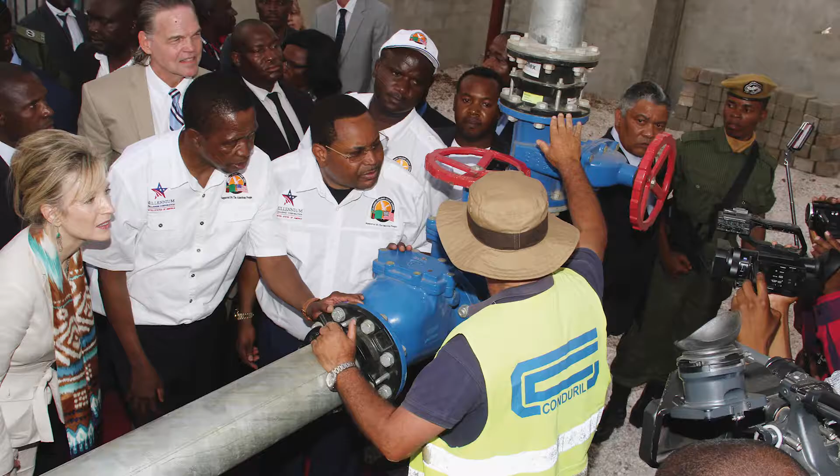The signing of the Millennium Challenge Compact set forth the terms and conditions upon which the MCC provided funding not exceeding $355 million to the government for the Millennium Challenge Account Program, assistance to advance economic growth and reduce poverty in Zambia.

The target was Lusaka City. With a population of over 2 million people, the city was struggling with major challenges in water supply, sanitation, and drainage.

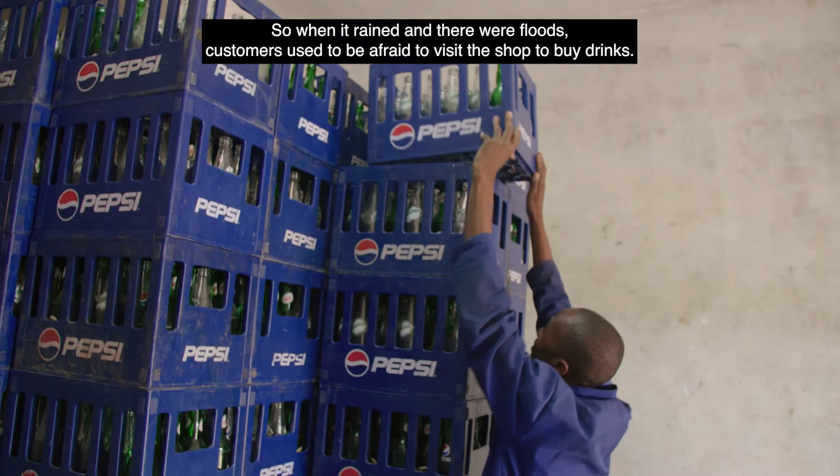In order to identify some of the key areas that needed infrastructure development to improve clean water supply, sanitation and stormwater management, master plans were developed. These master plans outline all major areas in the water supply, sanitation and drainage sectors that need investment and development for the entire city of Lusaka.

Thus, from these master plans, the MCC Zambia Compact identified critical areas that needed investment and development to lead to subsequent poverty reduction, improved health, economic growth and expanded access to clean water and sanitation.

When the proposal was approved by the Millennium Challenge Corporation, we did further studies to document exactly what the problems are in the water supply, sanitation and drainage sector.

Through the investment master plans done with the support of MCC, we were able to determine the magnitude of the investment required in the sector, clearly demonstrating that very little has been done. Looking at the figures over a 25-year period, up to 2035, about $4 billion is required to be invested in the water, sanitation and drainage sector.

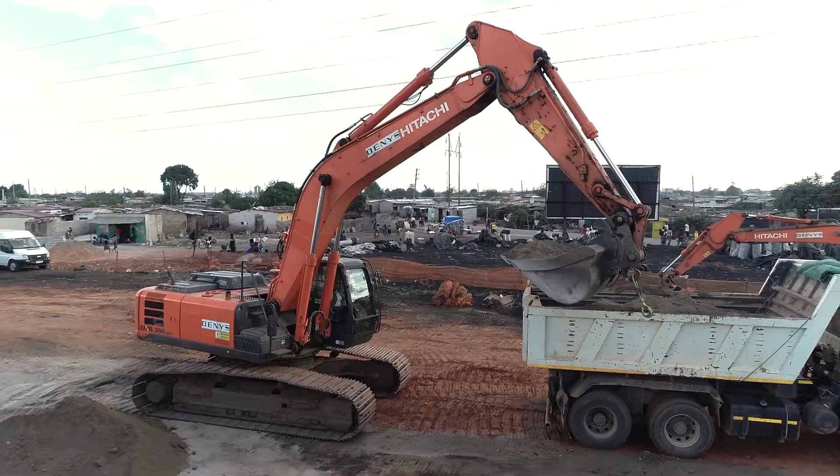Areas like Mtendere were to receive an expanded water supply network and a new sewer network. The area was not only picked because it lacked these services, but because it lies on an aquifer from which Lusaka Water and Sewerage Company draws water.

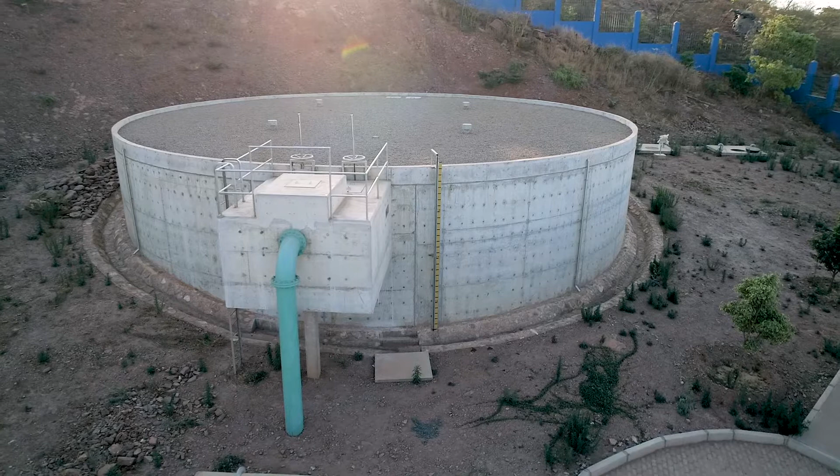In order to save this water from contamination due to the many pit latrines in the area, the new sewer network was inevitable.

The first 6 contracts or construction packages were water and sanitation. And then there was CP7 and 8 as well as CP10, which were drainage projects, in total almost 24 kilometers of stormwater channel.

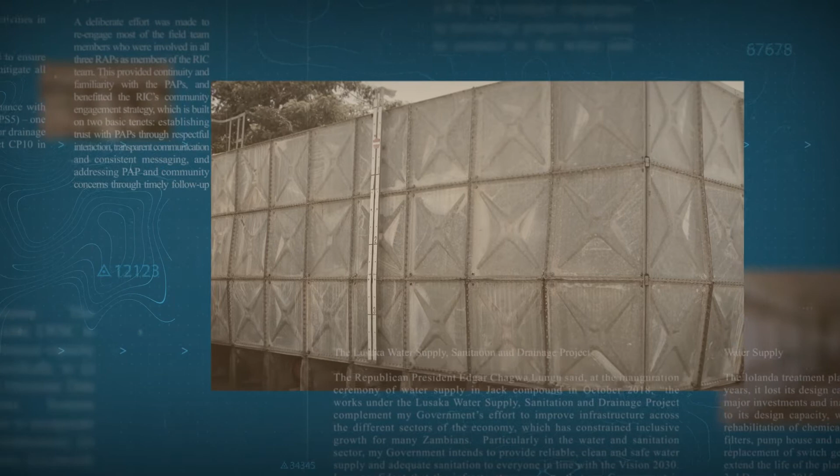The contract to rehabilitate Iolanda treatment plant in Kafue, 10 distribution centers, and installation of new pumps and water supply pipeline was awarded on 3 December 2015 and was worth $45.953 million. The contractor was Denys.

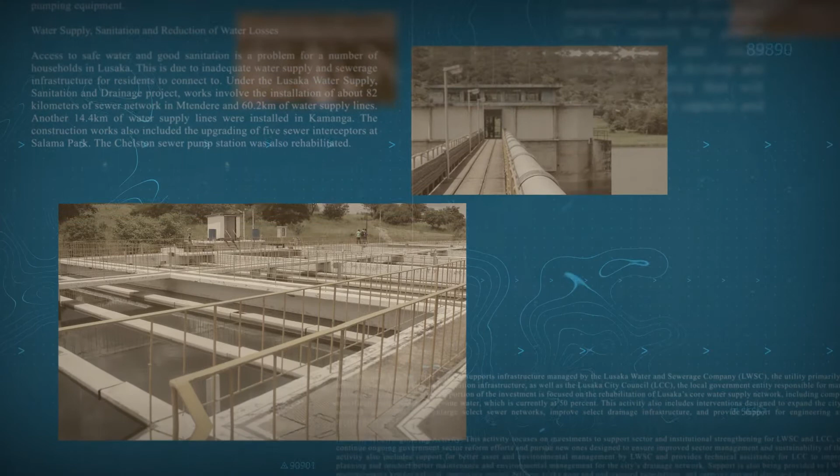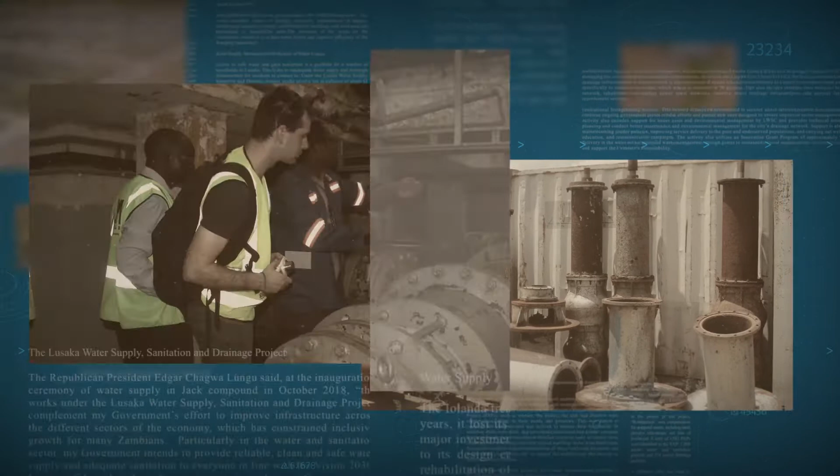The works done under these contract packages include rehabilitation of intake structure, chemical house, sedimentation tanks, sand filters, pump house and administration buildings, and replacement of pumps and switchgear, all done at the Iolanda treatment plant. The aim was to extend the life of the plant by 30 years.

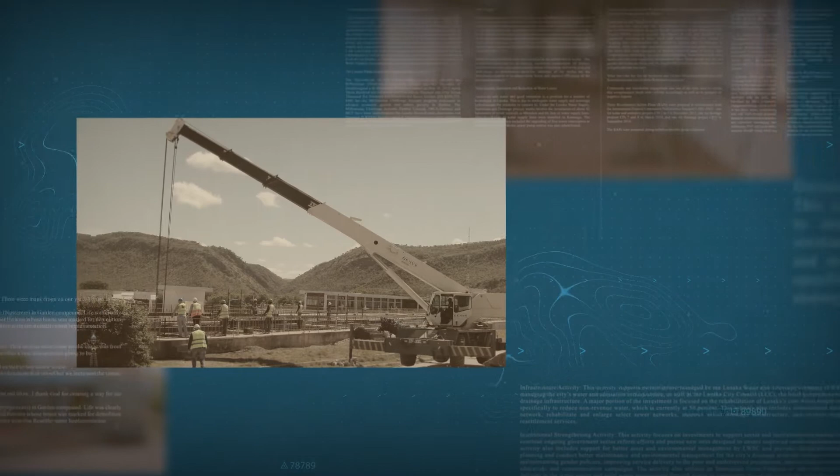Other works included rehabilitation of 10 distribution centers through repair of leaking reservoirs, replacement of pumps, introducing telemetry systems, rehabilitation of buildings and work areas, and installation of disinfection units, among others.

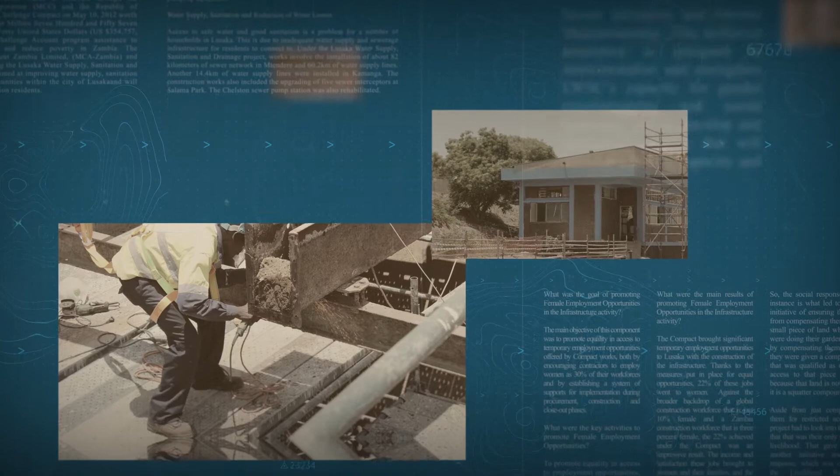At the end of the works, the goal was to restore the design capacity of the Iolanda water treatment plant to produce 110 million liters per day, or 110,000 cubic meters per day.

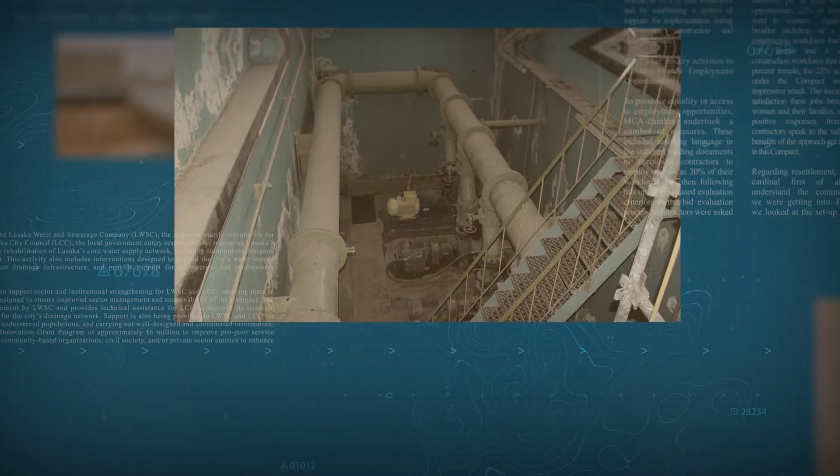The water produced and pumped from Iolanda water treatment plant is distributed to various consumers through a number of distribution centers. The intention of the Lusaka Water Supply Sanitation and Drainage Project was for the distribution centers to reduce water losses and improve efficiency of the pumping equipment.

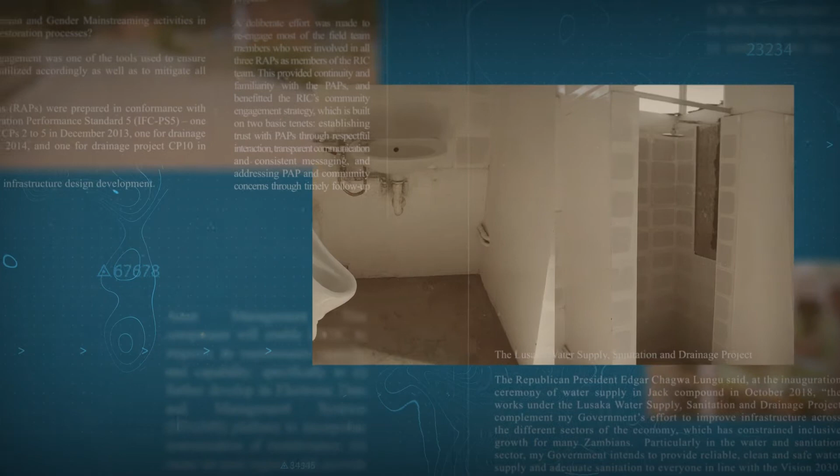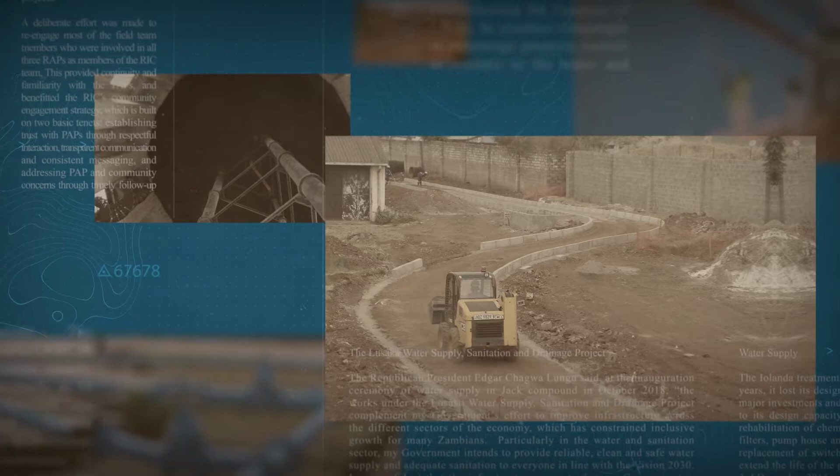The distribution centers, namely Chawama, Stewart Park East and West, High Court, Mass Media, Lumumba, Waterworks 1 and 2, and 7C, were rehabilitated with new pumps and in some cases new reservoirs installed.

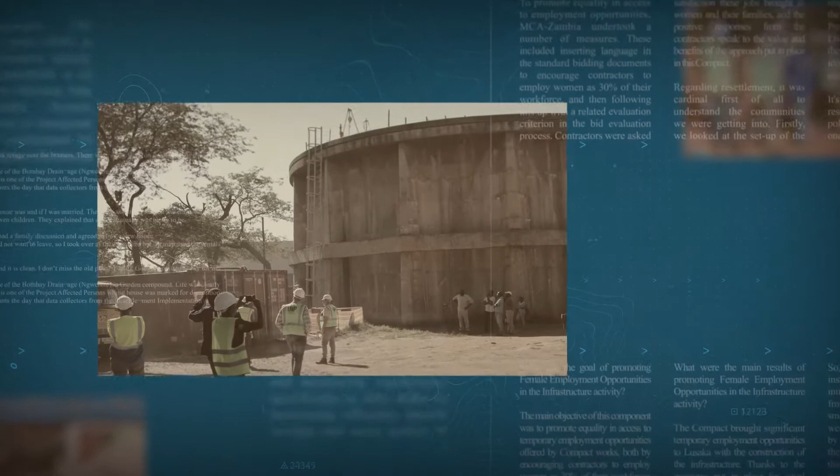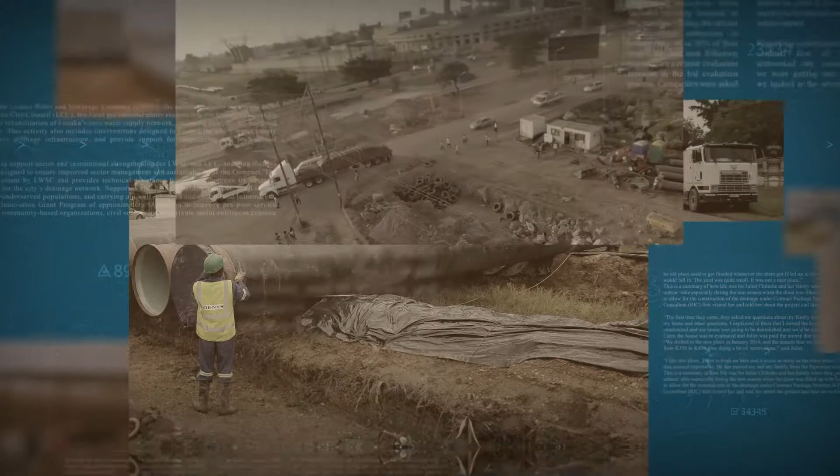In addition, this project was aimed at improving the capacity for Lusaka Water and Sewerage Company, the utility, to distribute the volumes of water required to meet projected increased demand. The works involved the laying of pipelines, and about 16 kilometers of pipe network was installed under this contract.

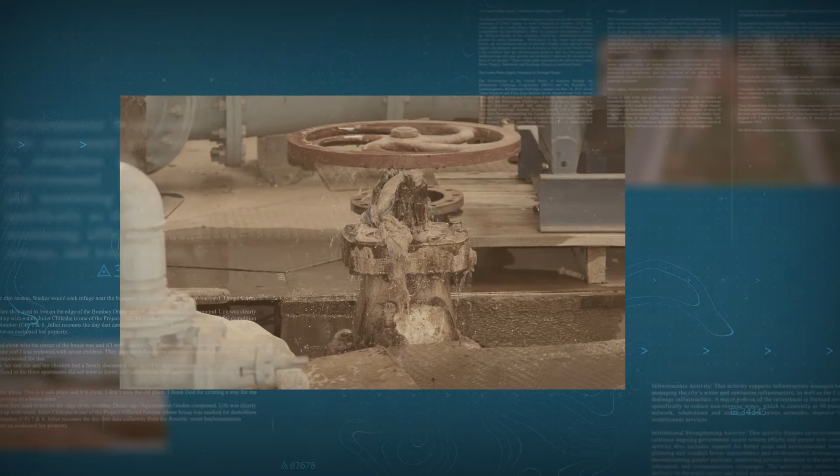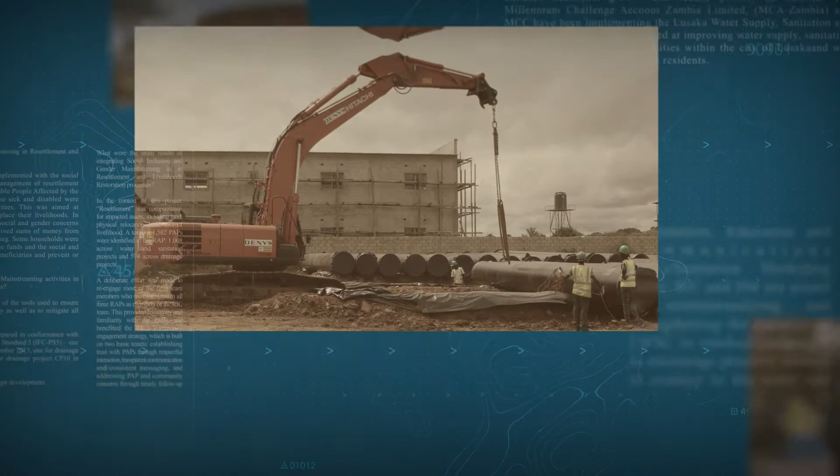We are at Iolanda Water Treatment Plant, constructed in 1970, a very strategic facility in terms of water supply to Lusaka City. This plant alone accounts for about 45% of the supply into the city.

And during these works, I think the city got to appreciate just how strategic it is, because we had to shut it down a number of times to do our work.

The work is substantially complete. We've changed pumps, we've done repairs on the civil works, we've rehabilitated the administrative block and a number of other ancillary facilities that support the plant.

This should give it easily another 25 years of service, and then the utility itself can go on to do other projects with the confidence that Iolanda is good, with good maintenance for another 25 years.

This was under CP1, and Millennium Challenge Account was executing 9 CPs. CP1 was Iolanda and the recipient infrastructure within the city - the reservoirs, the distribution centers that distribute this water to about half the number of townships within Lusaka.

We also had CP2, being executed by the same contractor that was doing CP1, which was just over 15 kilometers of large diameter steel pipes, up to 900 millimeters in size. That was also meant to enhance the utility's capacity to distribute water within the city.

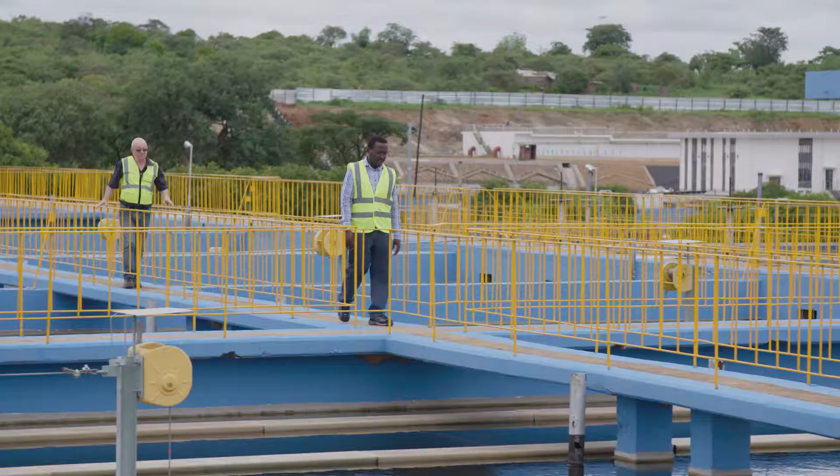New projects will come on, bringing in more water, and we've built additional capacity for the utility to distribute that water within the city. This is the single major source of water supply for Lusaka, and this plant is very critical actually to the operations of Lusaka Water and Sewerage Company.

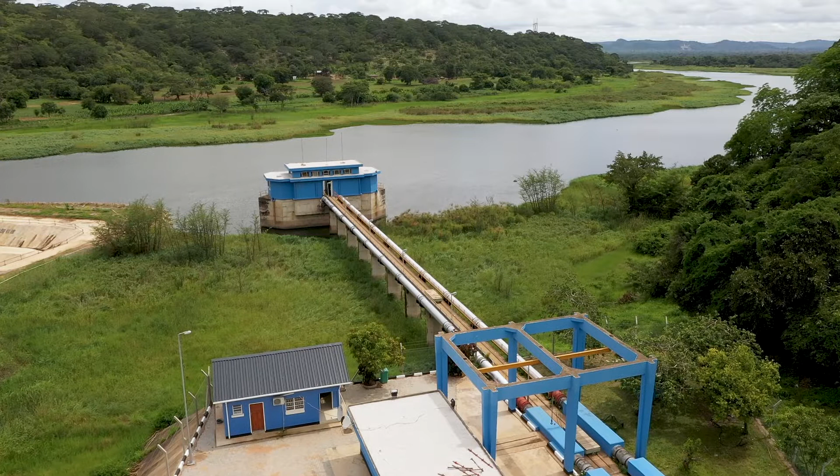So really, this plant supplies about 43% of the total water supply for the city. So anything that goes wrong with this plant really affects the water supply in Lusaka.

Also in terms of the quality of water that we produce from here - the quality of water we produce from here actually meets international and WHO guidelines.

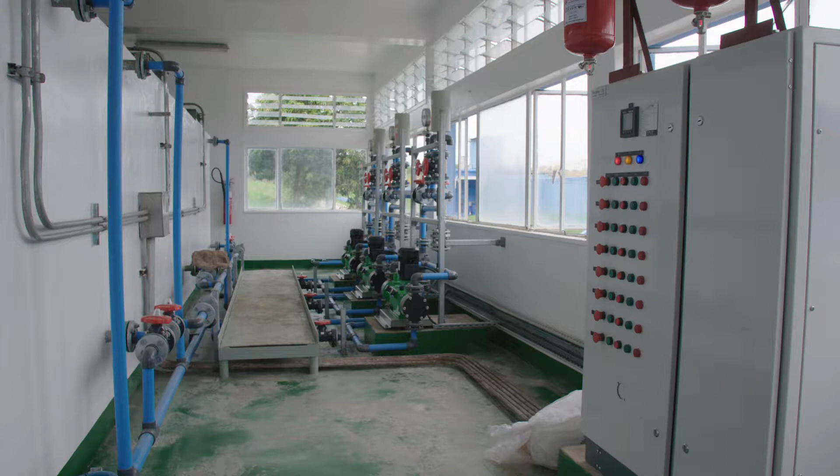There is a great improvement in terms of outlook and even in terms of efficiency, because at least we have seen an improvement in terms of our water production since the plant was rehabilitated.

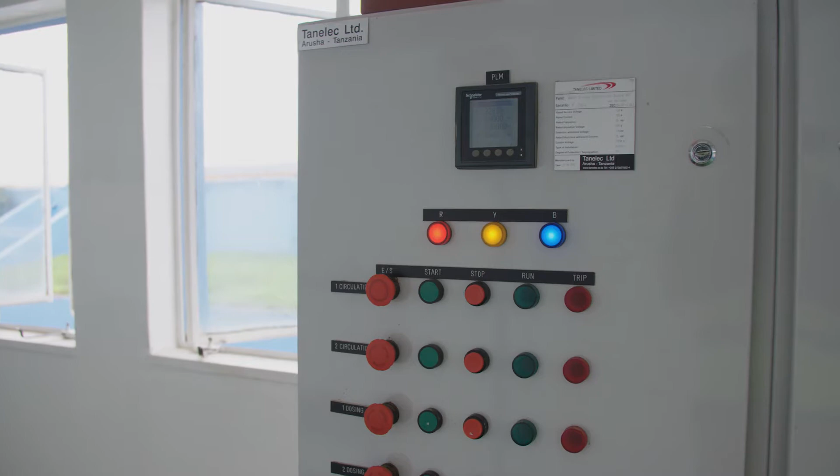Even in terms of the technology we have received, there's actually an upgrade - touchscreen technology, which we didn't have before, we have it right now. Operators are able to operate and look at what they are doing actually in the plant.

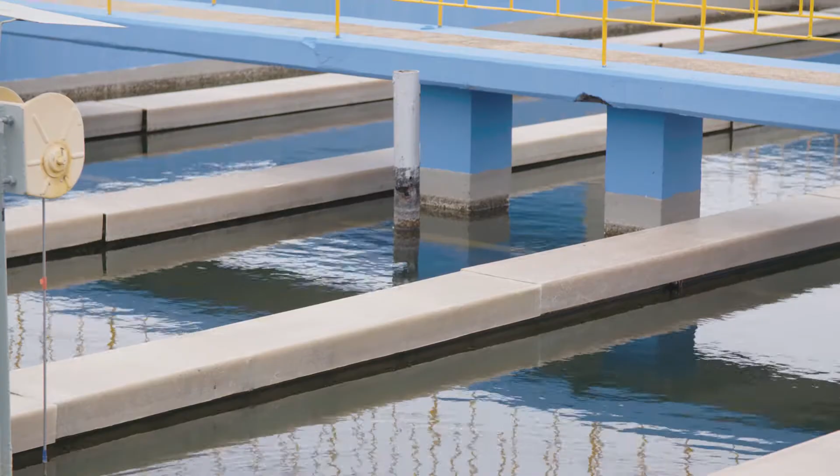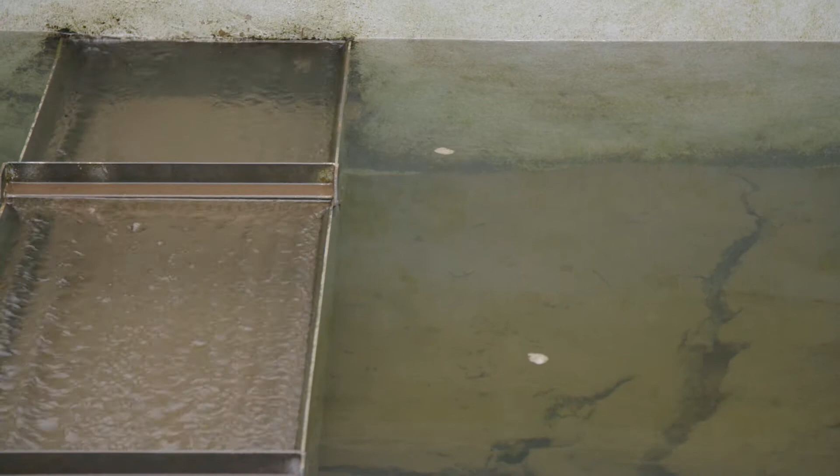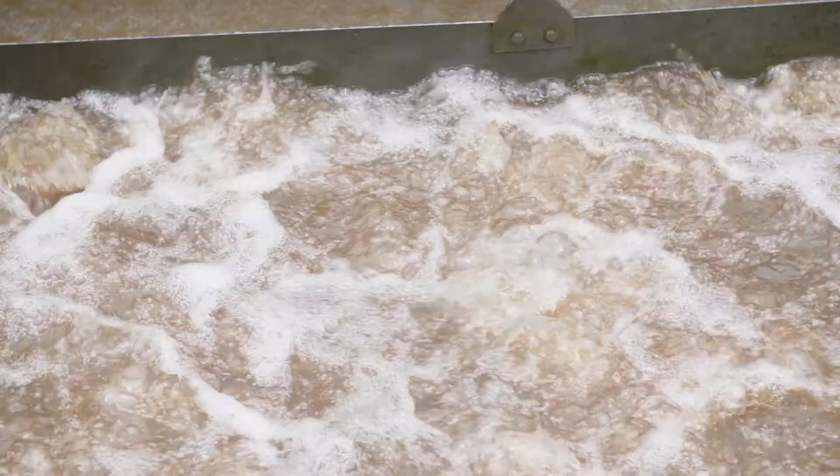I think the challenges we may face ahead is to sustain the maintenance of this plant. If you look around, you see there's an improvement in terms of the outlook of the plant, and we need to maintain it. There's also an improvement in the way we're doing our operations. So the challenge is to sustain that arrangement of improved systems that have been put in place. Water is life. You can't survive without water.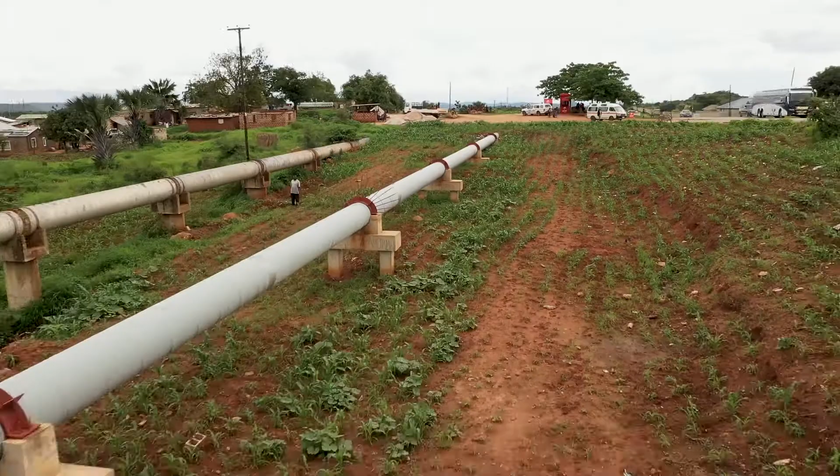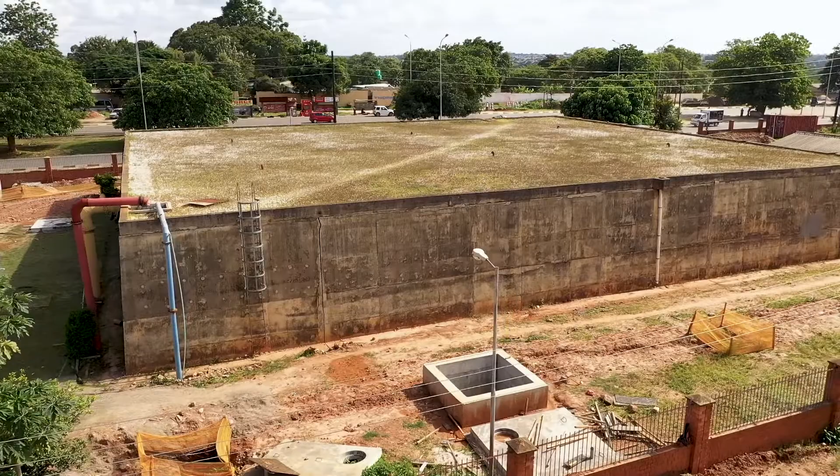This is Chelston Ground Reservoir. We are getting away from using this tank because it is in an old state and cannot hold any more water. It has a lot of cracks and was leaking a lot. So we thought constructing a new one would be ideal for this area.

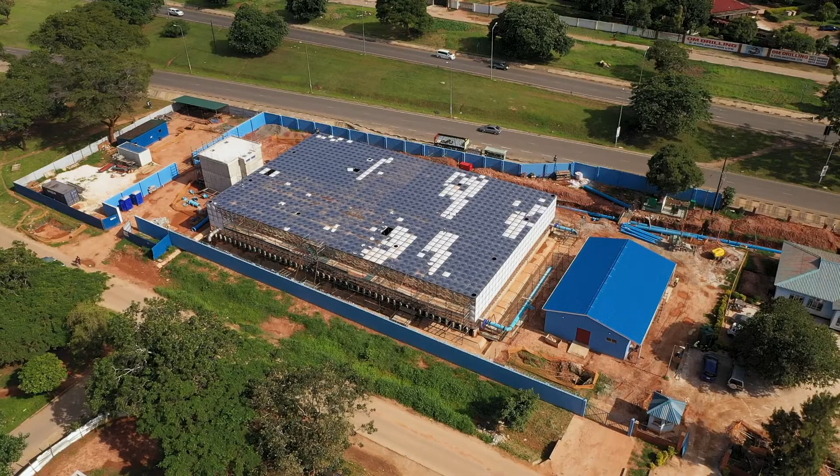Contract packages for water supply, sanitation, and reduction of water losses were another important package. Under the first contract, works involved the installation of about 82 kilometers of sewer network in Mtendere and 60.2 kilometers of water supply lines. Another 14.4 kilometers of water supply lines was installed in Kamanga. The construction also included upgrading 5 sewer interceptors at Salama Park. The Chelston Sewer Pump Station was also rehabilitated. All these works were carried out at a cost of about $22.4 million.

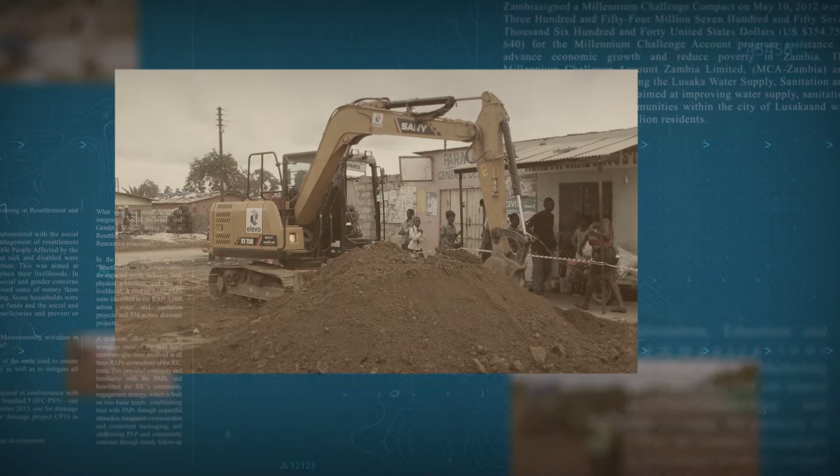Once completed, over 155,000 residents in Mtendere and Kamanga are expected to directly benefit from the investments. The interventions in Mtendere will provide sewer connections to 9,600 households and water connections to 6,400 households in Mtendere and Mtendere East. In Kamanga, over 1,000 households will be connected to the water supply network.

CP3 was a water distribution network, almost 80 kilometers, as well as sewer network for an area called Mtendere, one of the peri-urban areas in Lusaka. But there were also works in Kamanga and Chelston, as well as Salama Park, to work on the sewerage infrastructure.

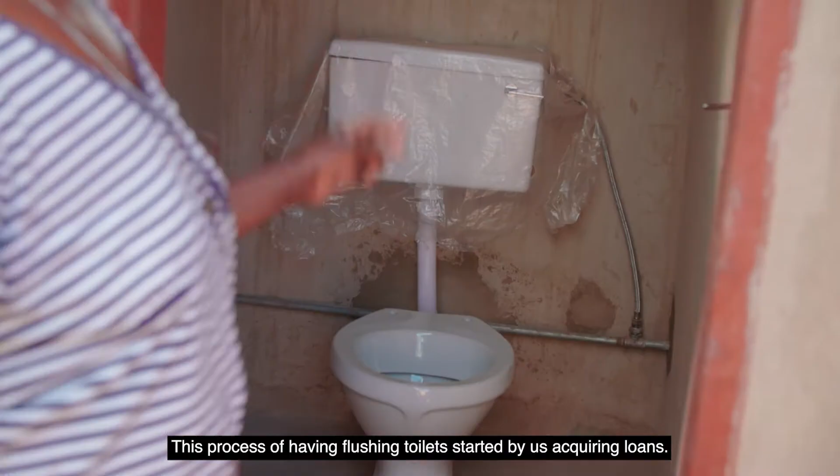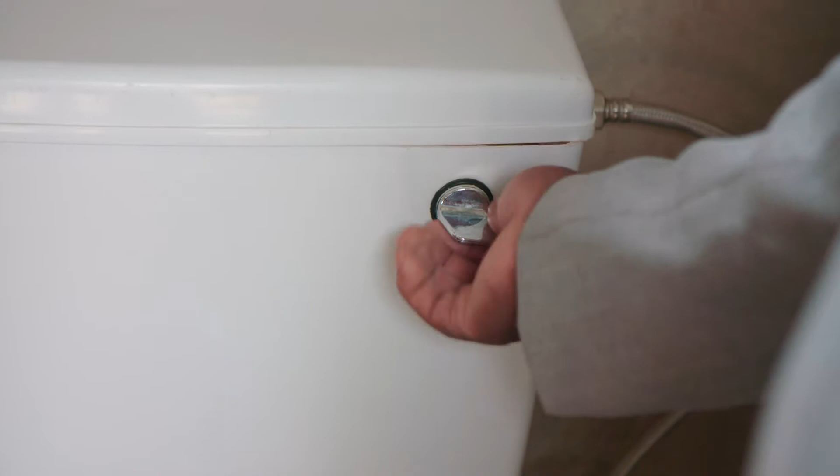Our toilet is well connected. We have got no challenge. We were told how to use the flushable toilets, and we are following the procedure. Even the Lusaka Water and Sewerage Company is now rehabilitating water pipes so that we have access to water all the time.

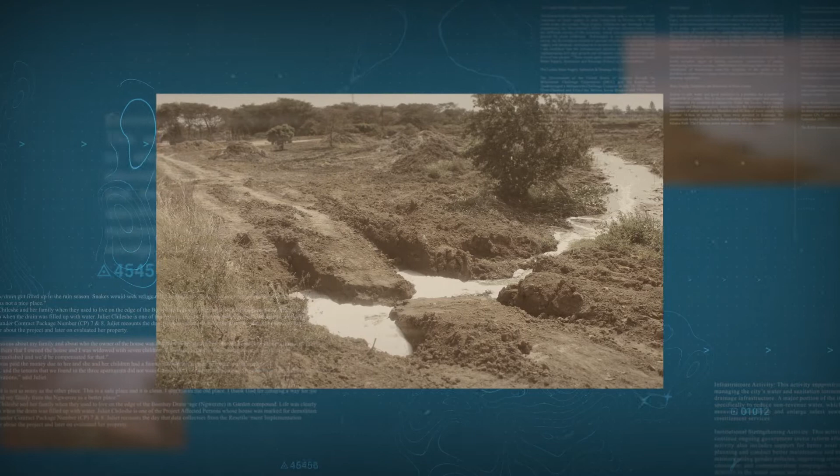The rehabilitation and expansion of Kaunda Square waste stabilization ponds was also completed successfully within the compact timeline. This involved the rehabilitation and expansion of the Kaunda Square waste stabilization ponds located in the eastern part of Lusaka. The ponds were constructed in the late 1970s to treat wastewater for a population of about 18,000.

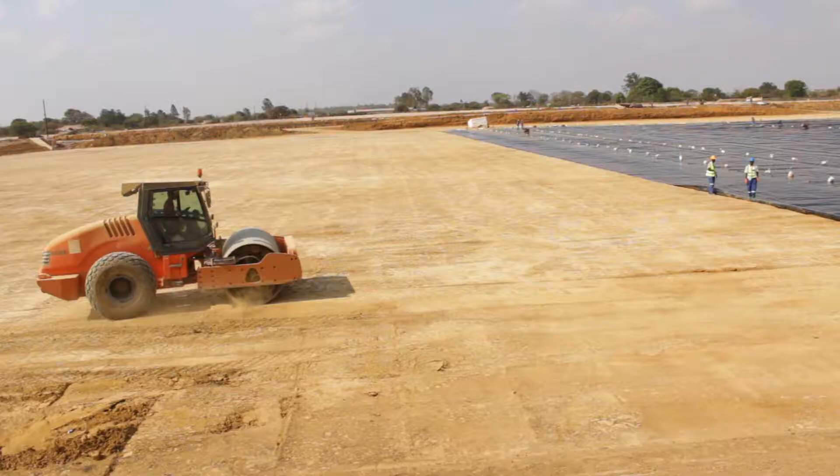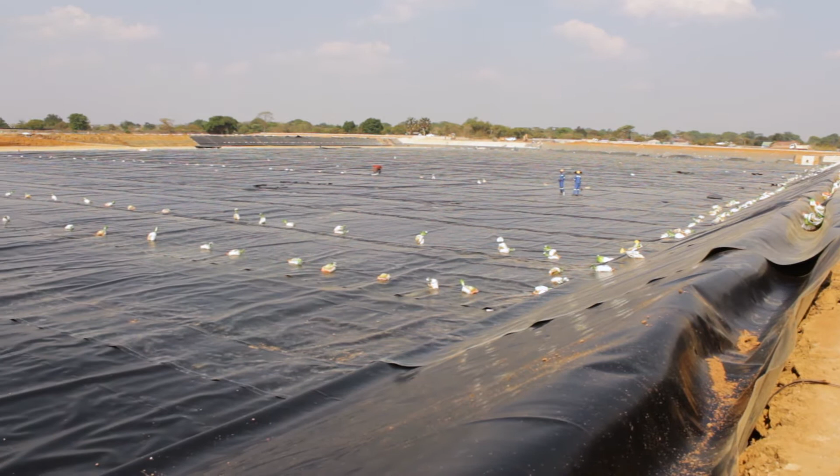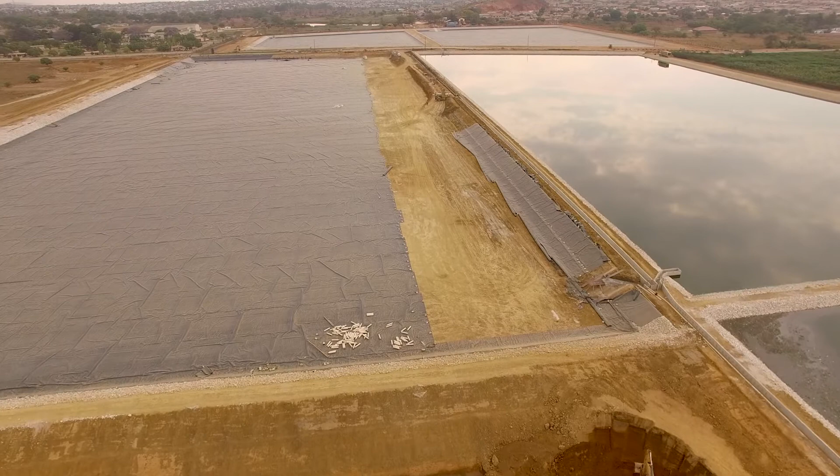However, with the growth in population over the years and economic development in the city of Lusaka, there was a corresponding increase in wastewater flow to the ponds. Despite this increase, the design capacity remained the same, thus overloading the system. The works involved rehabilitating and expanding the ponds to increase treatment capacity from 18,000 to 156,000.

I welcome everybody to this special occasion, which is very important for the Lusaka City Council. We are so proud to be part of this, because we've seen how the Millennium Project has changed many lives here in the city. Winston Churchill once said that the greatest asset any country has is the health of its people. And I look around and see this sign that says reducing poverty through economic growth. Without the health of Lusaka's people, it will be difficult to realize economic growth. So I'm very proud to be here today to mark this important milestone in the partnership between the US government through the Millennium Challenge Corporation and the government of Zambia.

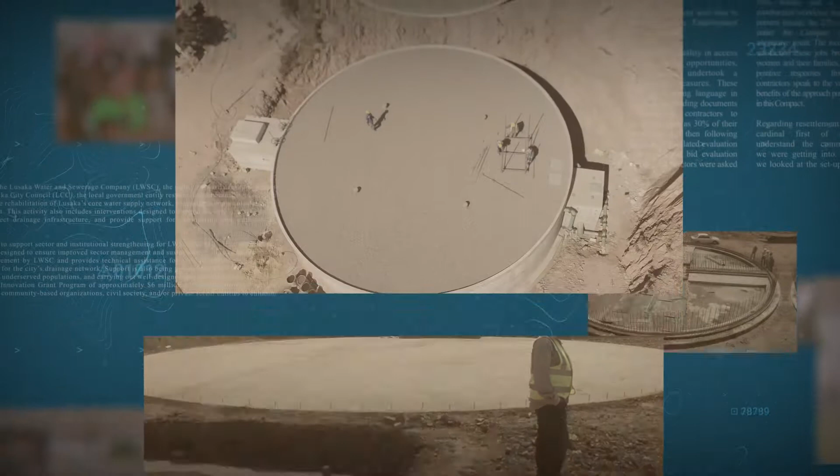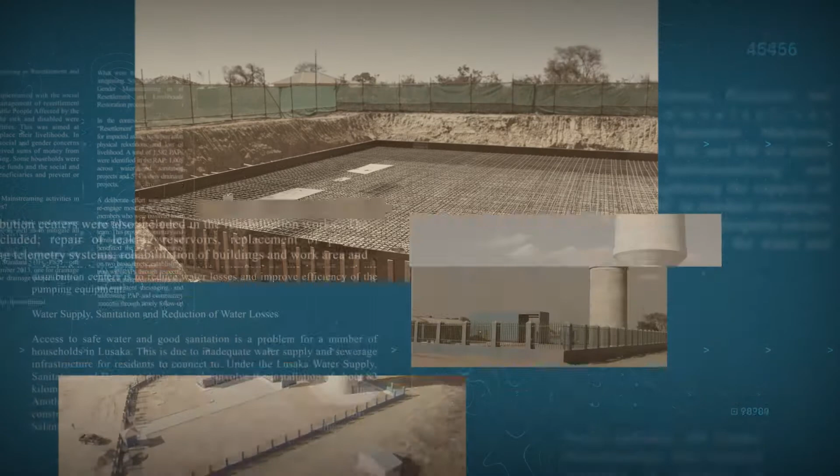Water reticulation in Ndeke, Kwamwena, SOS Village, Chipata and Ngombe is another success story under the Lusaka Water Supply, Sanitation and Drainage Project, having been completed with water supply now available in the targeted areas. Boreholes in locations with high-quality underground aquifers have been drilled and over 250 kilometers of water supply network installed. 33 closed kiosks, each with 2 taps, have been built in Chipata and Ngombe. The project was done at a total cost of $21.9 million.

In addition, a concrete reservoir with a capacity of 800 cubic meters in Kwamwena and a 30-meter high elevated concrete reservoir with a 700 cubic meter capacity in Ndeke-Vona Valley has been constructed. CP5 introduced new infrastructure to 5 areas called SOS East, Chipata Compound, Ngombe, Ndeke-Vona Valley, and Kwamwena. This was almost 300 kilometers of water pipeline with thousands of water meters for Lusaka Water to get additional revenue from the planned areas, and that was the approach used under the compact.

The water that we are receiving now is treated water, which is very safe for consumption, unlike the one we used from the borehole. I remember at some point we used to have ailments like stomach diarrhea when we used the underground water that we just drilled ourselves. Then when water and sewerage came on board, we saw there's so much difference, because sometimes we could even smell the chlorine, the medication they put on the water.

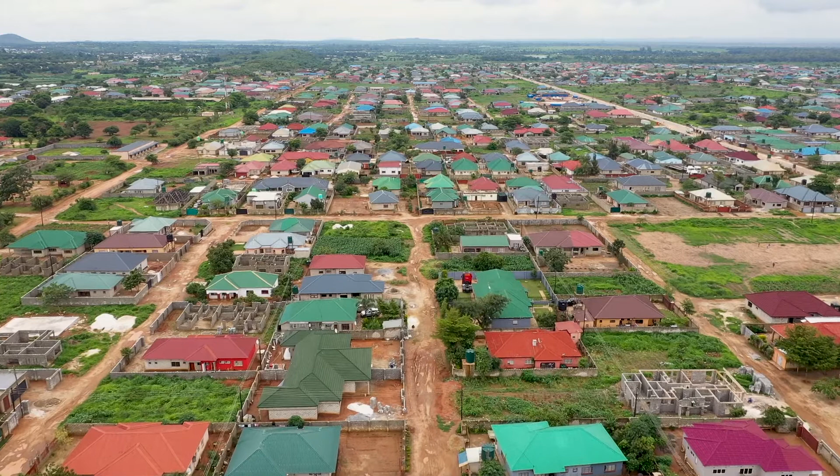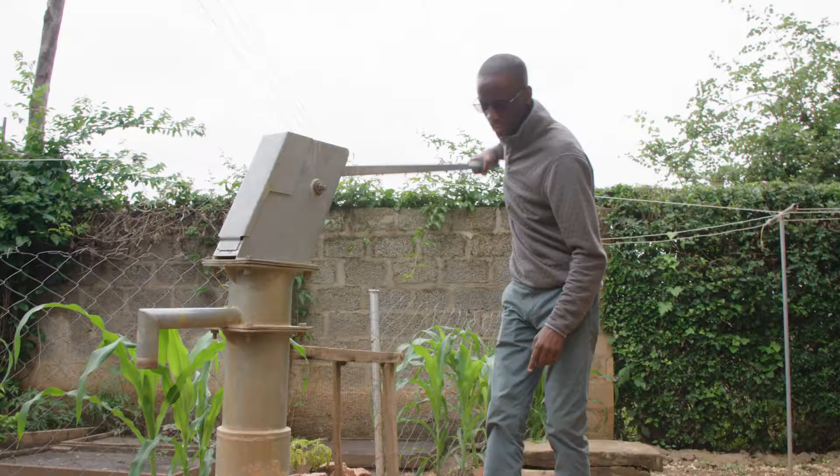The water from this hand pump looks clean at the very beginning when you pump it, but after a few minutes it becomes brown. The situation we have is very bad, in that my next door neighbor has a septic tank right 2 meters from here. The area is so easily contaminated by sewer water and so on.

What people must understand is this area was not originally designed for residential accommodation. It was actually supposed to be a catchment area for floods of Lusaka because it's the lowest side of Lusaka, but they decided to demarcate it into residential. We bought plots without them being serviced, so therefore it ended up bringing problems. We didn't have any water apart from what we were going to dig. The water table is very high, you dig about 7 meters and you hit water. Because of the small plots we have and the number of people who have dug septic tanks, it's very easy to contaminate the area.

We were blessed by the Americans with water. Without that help from the Americans, we'd be suffering. They came in and assisted us very, very much, and we're really thankful for that, because some of the residents' children were falling sick because of the same water. Now we can safely say we have water 24/7, which is clean. A lot has changed. I just open the tap and I have clean water. I don't have to think about what is in the water because it's all treated. So a lot has changed.

Under the second contract, the contractor worked on approximately 207 kilometers of Lusaka Water and Sewerage Company water supply infrastructure to replace worn-out portions of the distribution network. 14 district metering areas are being covered at a cost of $29.9 million.

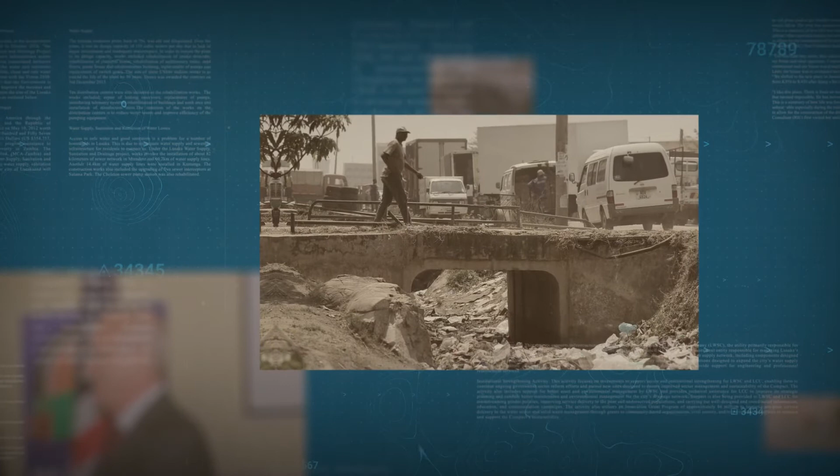For the most part, what is known as the Bombay Drain is mostly a natural drain flowing across the city south to north, but because it was mostly natural or with limited concrete lining, it was unable to efficiently collect storm water, leading to frequent flooding and stagnant waters in many parts of the city. This is expected to reduce once the entire drain is completed.

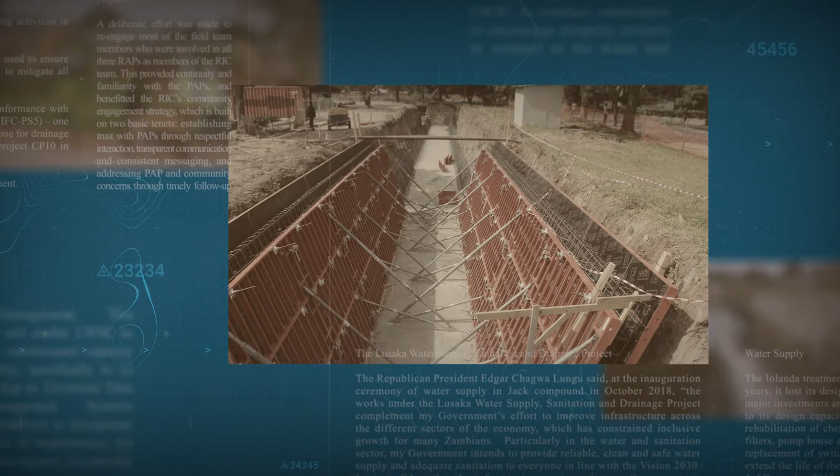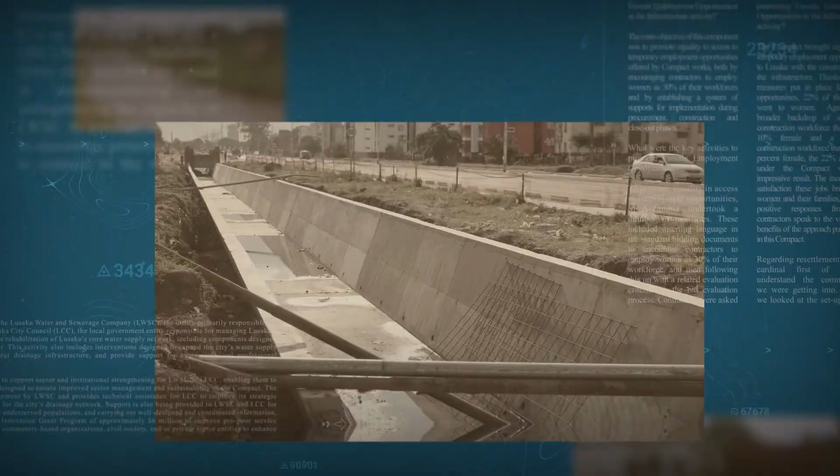CP7 and 8, as well as CP10, which were drainage projects, in total almost 24 kilometers of stormwater channel.

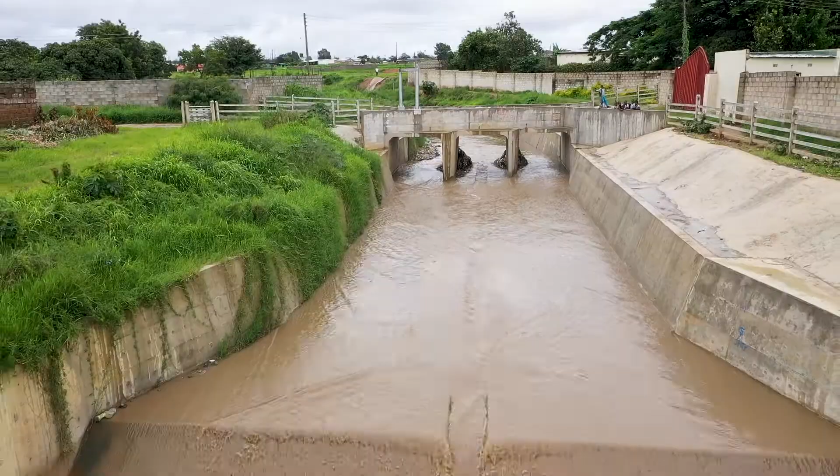Because the water was so much and going inside the houses, and the houses were broken. It was difficult because the children were falling in the water, they were dying. We are happy to have brought us this Bombay drainage. Here we are safe, the bridge is okay, and we are fine to pass. Now that they've put this drainage here, it's okay. People can go, even the children can go to school, it's safe. I'm a mother with 3 children. I'm very happy because when they go to school now, it's safe.

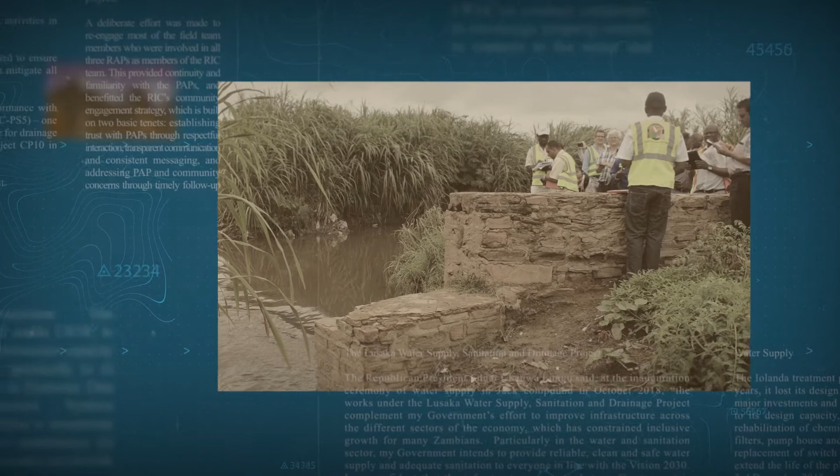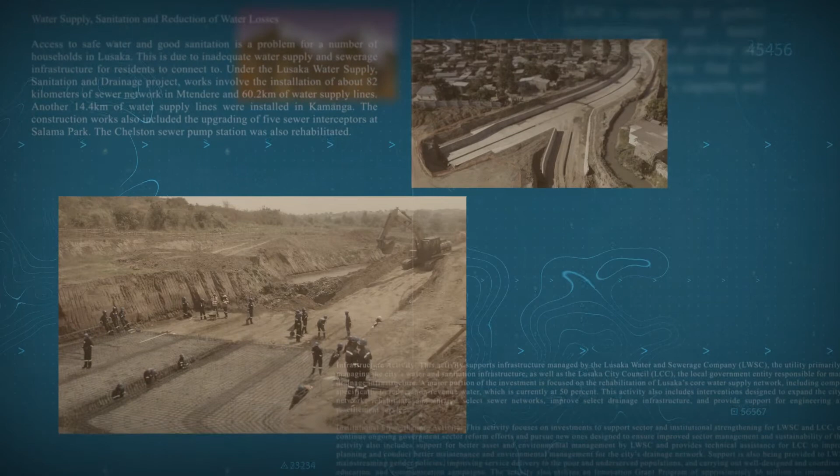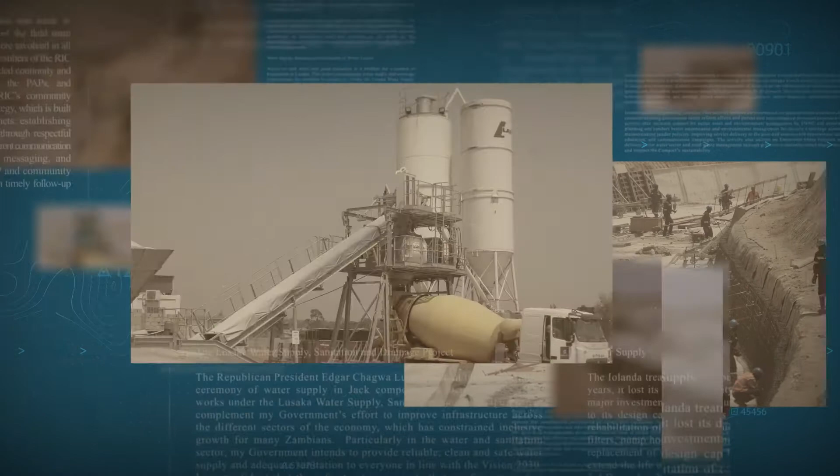The tail end of the drain is known as the Maziopa Drain. MCA Zambia engaged Gabriel A.S. Couto to construct and rehabilitate over 2.6 kilometers of drainage in Maziopa settlement at a cost of $17.2 million. The drain was constructed to avert flooding downstream, which was expected to increase as a result of the rehabilitation of the Bombay drain.

The Bombay drain is expected to have increased stormwater flow downstream, thereby reducing flooding in the city and affected areas. However, the increased volume of water would have had the potential of increasing flooding for residents of Maziopa, as the Maziopa area is located downstream. The Maziopa drain was therefore designed so that stormwater is channeled into the Ngwerere River, safeguarding the lives and property of the community of Maziopa.

The drainage works were officially handed over to the Zambian government on November 2, 2018. MCC Vice President Ms. Jean Hawke and Minister of Local Government Honorable Vincent Mwale officially inaugurated the completed works.

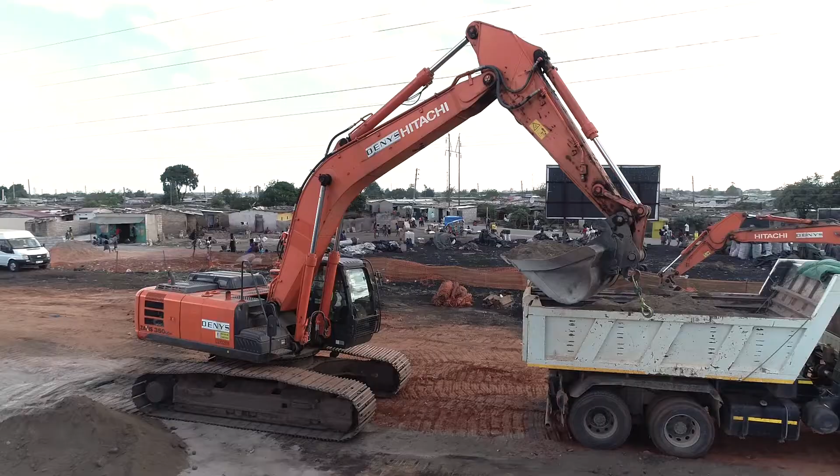Working on this project was not an easy task, as there were many challenges that the contractors faced. For one, the work was done in already built-up places, meaning little or no space to maneuver machinery. In some cases, especially on the Ngwerere drain, houses and pit latrines were built right on top of the drain. This called for extensive community engagement.

This is their project, this is not about Millennium Challenge, this is about the sustainability of the investment that we are implementing. It means that residents in Mtendere, who've been able to arrest people vandalizing the infrastructure, this results from being aware that this is their project. Residents in Maziopa who arrested people stealing the palisade fencing, this is coming from a realization that this is their infrastructure.

This kind of activism, this kind of ownership only comes from a very strict and robust process of constant engagement of community members. Because then they're able to protect the infrastructure, they're able to own the infrastructure, and they become vigilant because they know that these resources belong to the community.

What have we seen as well? By engaging civil society organizations and the media, we have seen constant engagement and discussion around the need to invest in water supply, sanitation, and drainage infrastructure. We have brought this subject onto the public platform, onto the public agenda. We are building this agenda for the future. Community members, civil society organizations, government officials, and other stakeholders have now been fully engaged with this project, and they are supporting the cause of what we are doing.

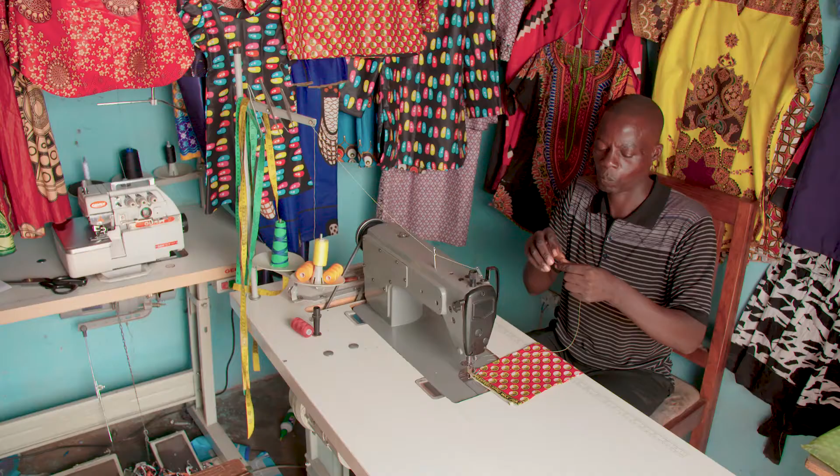That gives me joy. Across all the contract packages, the communications sector, in collaboration with the social and gender sector and the environmental and social performance sector, ensured that the project's impact on the community was looked into at all costs. Some members of the community who lost gardens, businesses, or properties because of the works were compensated.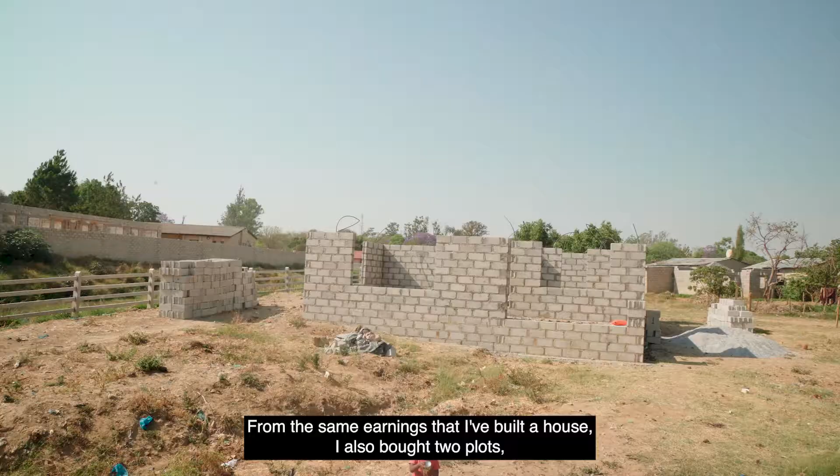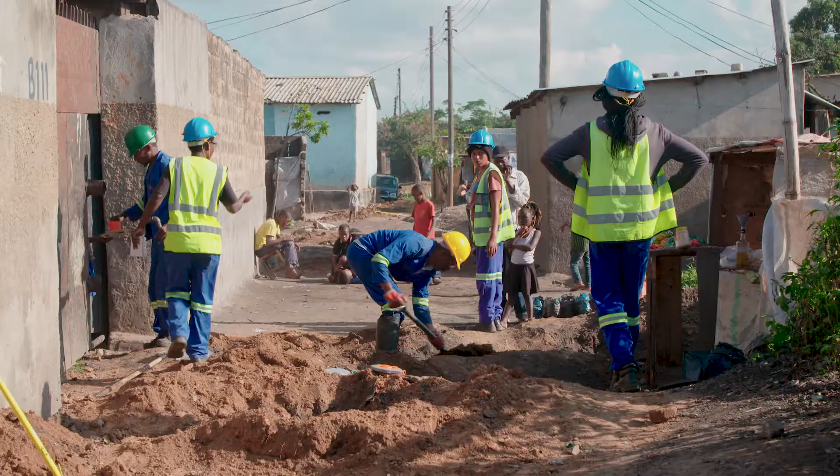Apart from compensating those affected by the works, the Lusaka Water Supply, Sanitation and Drainage Project ensured that construction works in the different areas of Lusaka was done with the community's safety in mind. MCA Zambia ensured that all contractors adhered to strict health and safety regulations.

As part of the requirements of the compact, the project needed to be approved by the regulatory body from the environmental perspective, that is the Zambia Environmental Management Agency, ZEMA. So in the beginning, we had to make sure that the environmental and social impact assessments and the resettlement action plans, which were developed to assess and manage the environmental and social risks of the project, were approved by the regulator before the actual construction works could start.

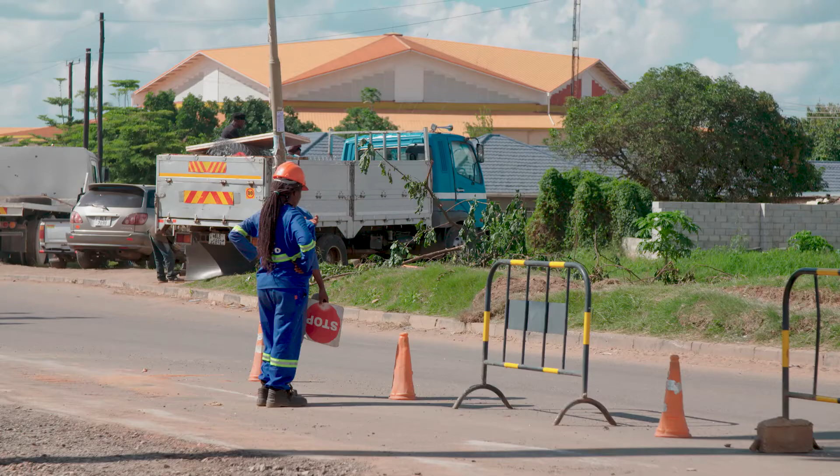We also made sure that the environmental and social management plans, the actual activities that needed to be mitigated during construction, were incorporated in the bidding documents at procurement level, to make sure that the contractors have the relevant information they needed to plan their environmental and social management plans and health and safety management plans. This way, as they construct, the people in nearby areas are safe, as well as the workers doing the actual construction.

It's been a complex process because implementing resettlement in an urban environment is complicated. There are a lot of people, a lot of structures, and so the construction corridor is quite constricted. There were a lot of limitations in terms of how construction was to be undertaken.

So we had to do a lot of work to make sure that we minimize as much as possible the resettlement impacts. But even with all those efforts, we still could not avoid the resettlement. So we ended up compensating more than 5,000 people.

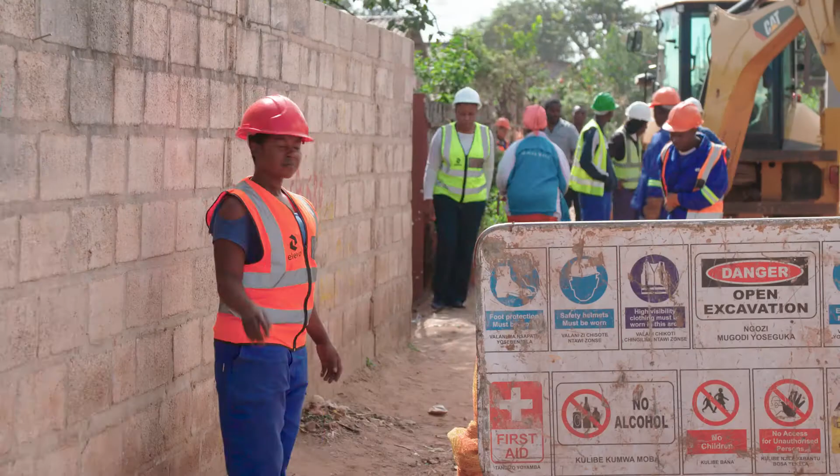Working in an area which is heavily inhabited, high density, with a lot of children and women, people crossing roads, the construction corridors were quite challenging to manage from the construction side. So we had to make sure that the requirements from the health and safety perspective were followed to minimize accidents, to minimize affecting the public in terms of access to their businesses, access to their homes, because these activities were happening just in the neighborhood of their businesses and their homes. It was a lot of work, but we managed to achieve that as well.

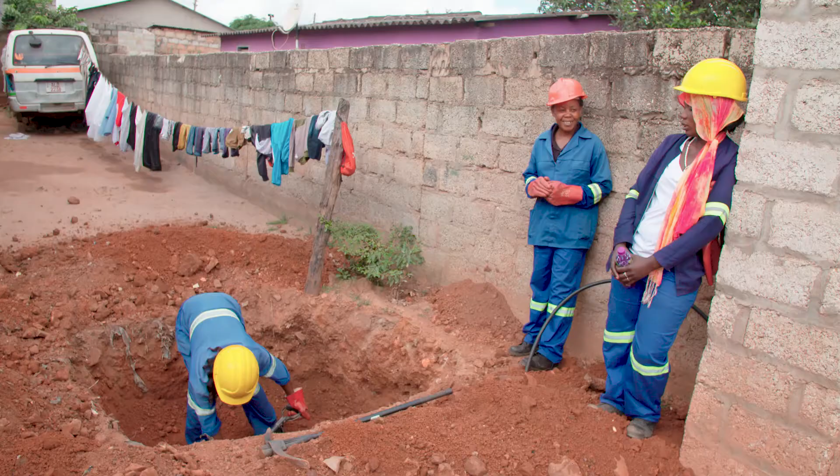Women, children, and the vulnerable were not left out in this project. Through a robust social inclusion and gender mainstreaming program across all contract packages, women were given an opportunity to participate on the project, not just as spectators, but as workers employed in different capacities, from general workers to managers.

These infrastructure works will benefit more than 1.2 million people and will greatly improve service delivery by the two implementing entities, Lusaka Water and Sewerage Company and Lusaka City Council.

I think this is where the institutional strengthening component has really helped, because our officers at the departmental level and our policymakers have been capacitated to manage the drainage post the compact period. So this is where we would like to express our gratitude to the compact for including the institutional strengthening, because it will ensure sustainability of the project, because as an institution now, we are able to manage independently with the knowledge that we have acquired.

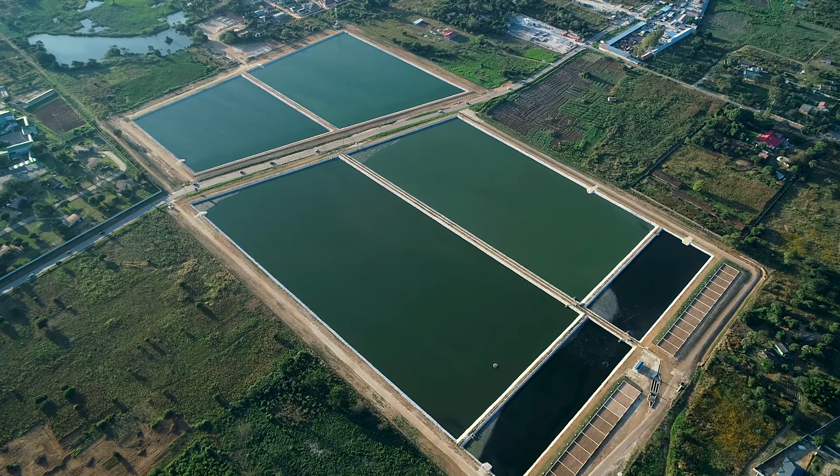The technical assistance has been very valuable in order to improve on the capacity of our members of staff. We're able to build a dedicated team to enhance the management of our assets so that we can derive the maximum value out of it.

Also, the issue of non-revenue water, which we hope we'll be able to reduce. The technologies and the products which we are developing have to be gender sensitive, so we want something that is acceptable to the community, affordable and sustainable.

We're looking forward to facing the challenge of taking over and operating the infrastructure, but we are confident that with the capacity which we have built, particularly with the involvement of the TAs and the interactions we've had with the different experts, we'll be able to manage the systems.

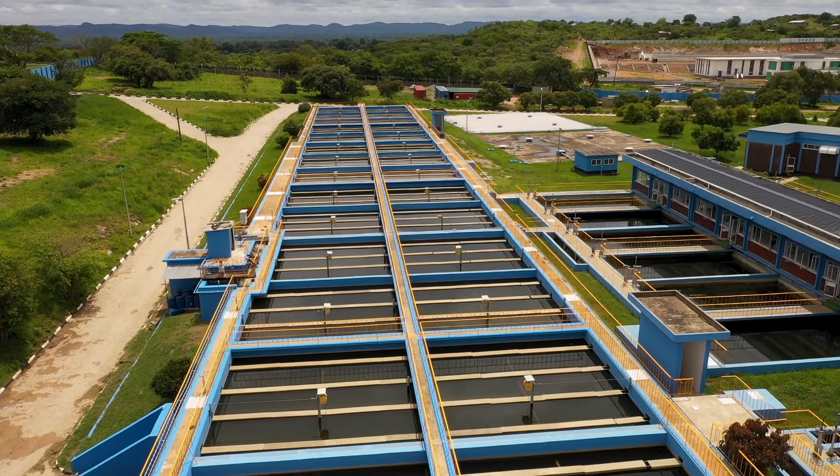This has been challenging. I mean, we've been implementing such a massive project in a built-up area, a city of Lusaka, and we face challenges each and every day to do with relocation of utilities. Just dealing with the different people that had to be displaced because you needed the area for the contractor to use as they were constructing.

But with the support of government, the various people that we worked with, Ministry of Water Development, the Ministry of Finance, Ministry of Local Government, we were able to have all those issues resolved before the contractors went on site. And then obviously we have made people better off than they were when this project started. For all the people that have been displaced, I'm very proud to be associated with that.

And also the fact that government was able to let us implement this project in line with the MCC guidelines and policies. There was no interference. We had a lot of support.

For me, I'm very happy to be associated with a project that has delivered what it promised from the beginning. And I know when we started implementing the project, there was a lot of skepticism from people saying, how do you spend so many years planning for a project before you start implementing it? The preparation took too long.